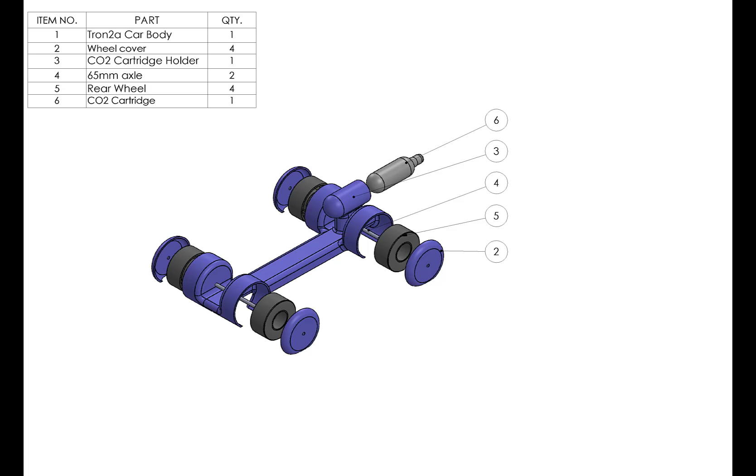So if you're having trouble generating an exploded assembly of your CO2 car, or you simply couldn't be bothered to do a little bit of work or research to try and figure out how to do it, I'm going to go ahead and walk you through the process and make sure that you have your assembly for your CO2 car, and let's get started. You're going to go and click on exploded, right?

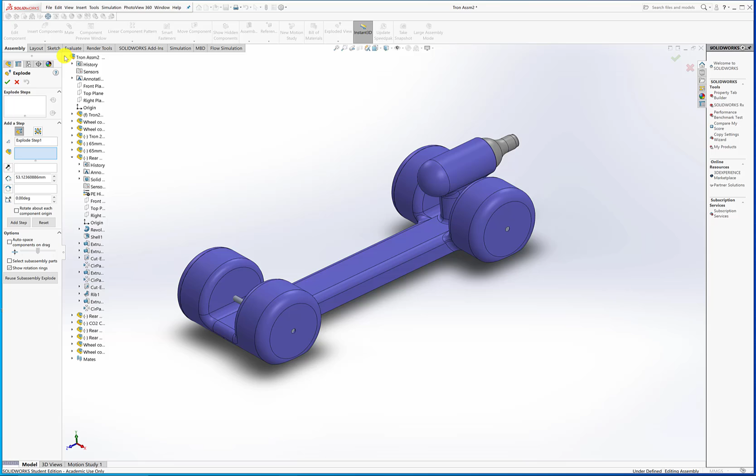So exploded view allows you to then take any part of the car from that tree, or just one at a time. So I'm going to go ahead and select one, pull on that arrow as far as I want it, and click done. That is going to give me my first step. Then I click on another one, pull on it, and then click done again, and that'll give me a second step.

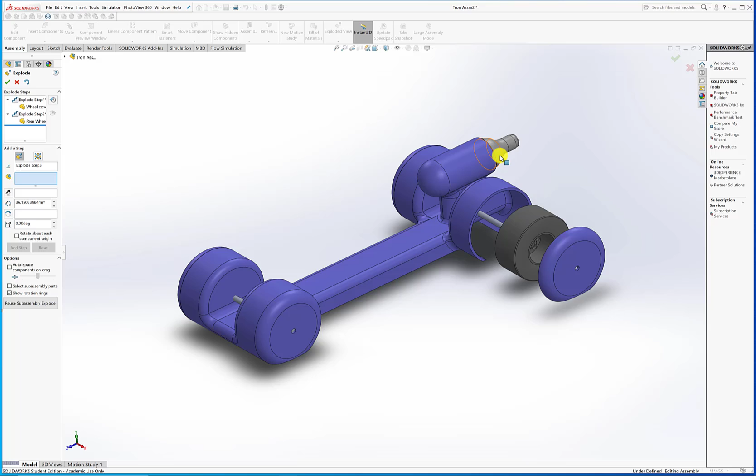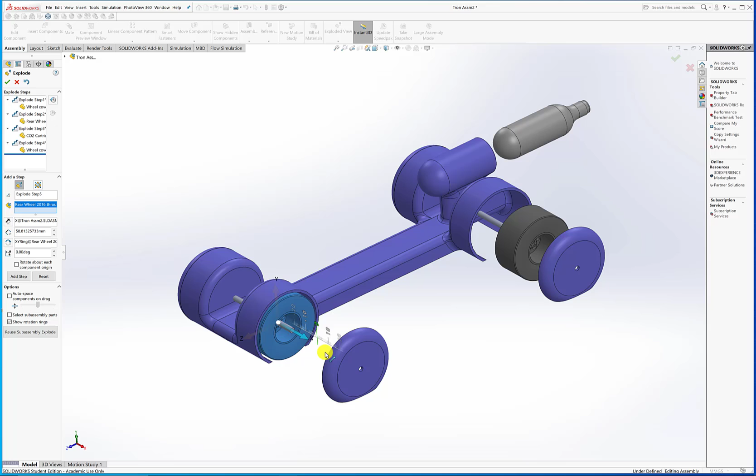So obviously you're going to be doing this for all of the subsequent parts to make sure that you have one step per part. So don't exit the exploded view menu just yet until you finish all of the steps. So I went ahead and clicked done on my wheel covers and then all the tires. I'm going to leave the axles in place because I think that looks better.

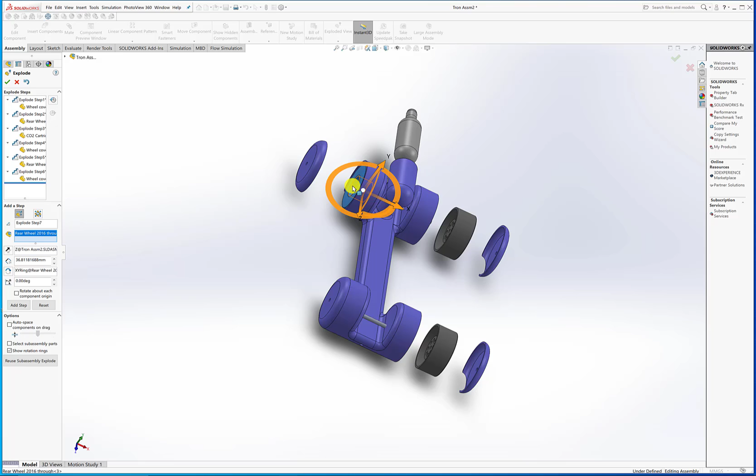All right. So I've got all of one side. You could leave it that way if you wanted to, or you can go on and do the other side of the car. I'll leave that up to you, but at the very least, if your car is symmetrical, you'd want to have at least one side of the assembly exploded. Okay, so you do the same thing for every part, and at this point, you'll notice we have a bunch of steps saved.

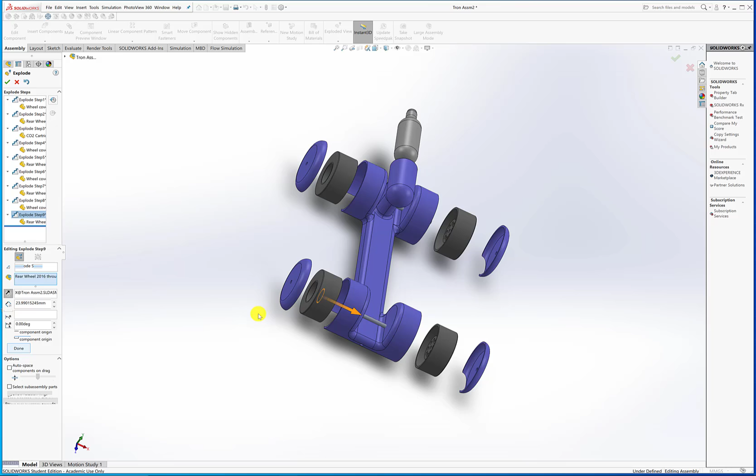So once we're finally done, set it up the way we want to, and then click the green check for OK, we are done. All right, so now the next thing, how do we make the drawing? Okay, so if we go to make a drawing and select your paper size as usual, I don't have the T-Deck one here handy, so I'm just going to do whatever. And then you pick your assembly.

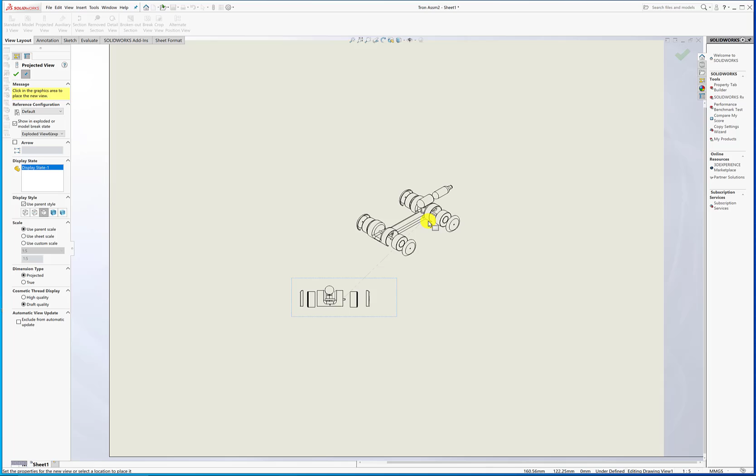Now, on here, once you do that, make sure that you look at this little box and select the ability to be able to pick the exploded assembly. And you click once and you'll notice that it is available to you. I only want the isometric, so I'm going to drop that one and get rid of the other ones. All right, so I get rid of that.

I also want to change the color to full solid, making sure, of course, that you have colored yours at least in some semblance of what you want the final product to look like. And I'm also going to change the scale. In this case, I made it 1 to 2 so that it was a little bit bigger. Move it around in your paper as you wish, and that looks pretty good, right? But it looks pretty empty.

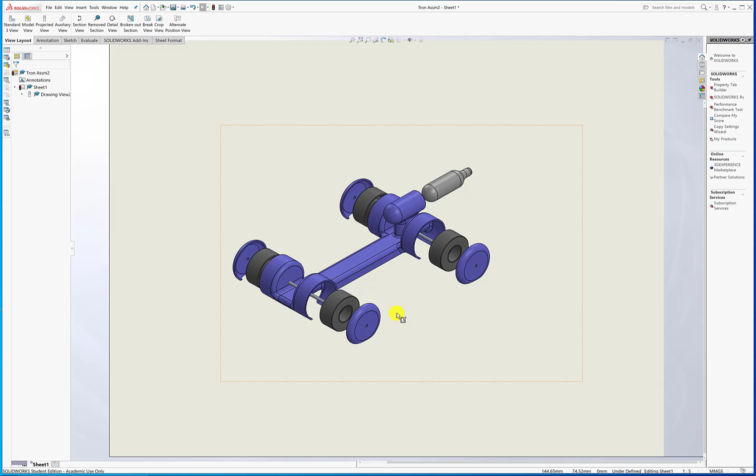We need more stuff. In order to find the bill of materials, go to Tables, Bill of Materials, and it might give you an error saying you first have to select the actual assembly. So click anywhere on your vehicle and you'll get a menu. Once you click on your part on the car, anywhere on the car, you'll get this whole list. Don't worry about it. Just click OK, and automatically this list pops up. Say, oh, that's kind of cool.

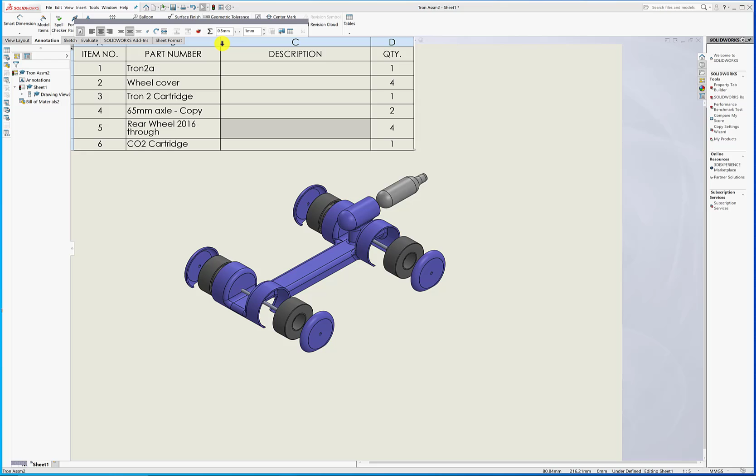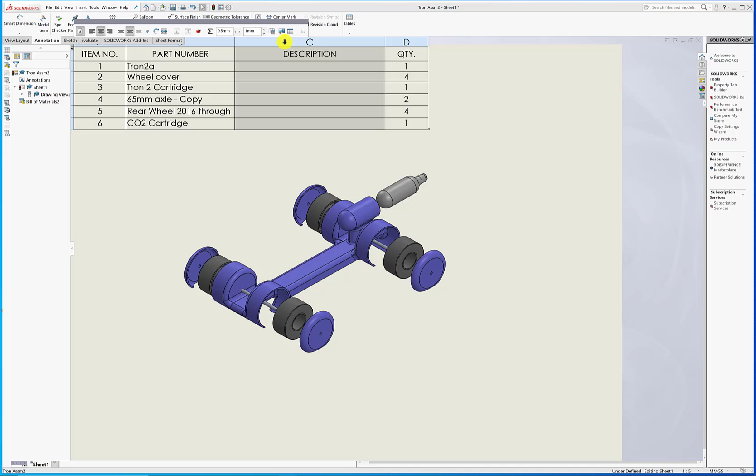But every part that is in your car is on this list, and you can move it around. You can resize the table, etc. In my particular case, I don't want everything on here. I can put a description, but the description and the part may be one and the same. So I resize it, but then I decided that I'm going to go ahead and get rid of the description column. So I can click on that and just hit delete.

Then if I double click on any one of those lines, it'll give me a question: hey, do you want to change this so that it looks the way you want it to look on this drawing, or change the global variables? Just say yes, and I change the part number to the car body. And I should have checked, don't bother me anymore. I'm going to change them as I want to.

So I have all of these parts named the way that I want them named, because the part number for each part may not be what you want to call it. All right, so go ahead and change whatever else you want to change. And I think on the top one, where it says part number, I was going to go ahead and change that as well. Oh yeah, the axle, 65 millimeter axle. I don't need the word copy.

I can get rid of this. Get rid of additional verbiage for the rear wheel. And then finally get rid of the word number. I'm just going to go ahead and leave it as part.

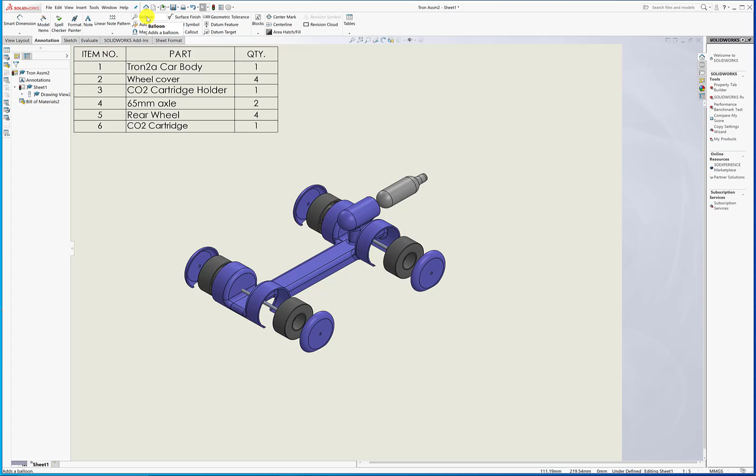Okay, so now I'm going to add some balloons, which are pretty cool because it points to each individual part and what they are. So just go to your menu, click on balloons, and you can select each part and it automatically drops a little balloon with an arrow. And I click on it and it gives it a number. All right, so click where you want to drop it.

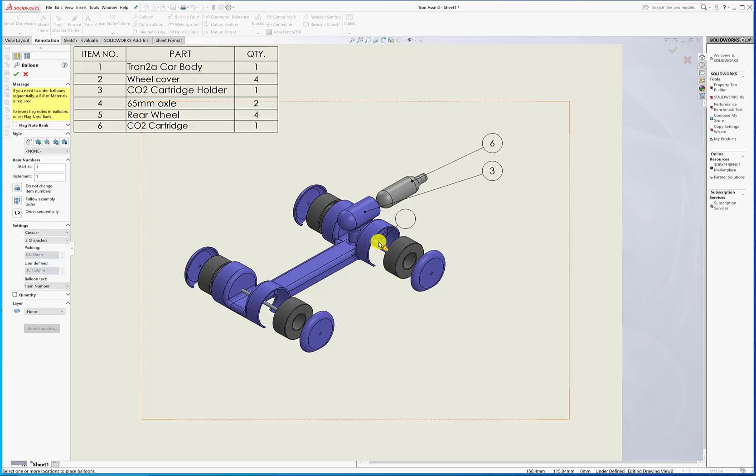Well, that's number 6, the CO2 cartridge. And then that's the next one, number 3, which is a holder. And you can line them up in this case just to make them look pretty. And now it's starting to look like a semi-professional drawing, right?

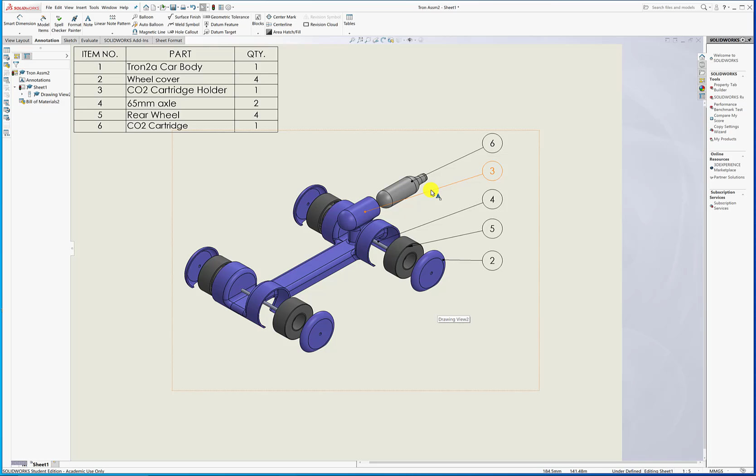So hopefully this helps. Let me know if you have any concerns or issues, but spend a little bit of time on it. All right. Good luck. Let's hope it looks good.